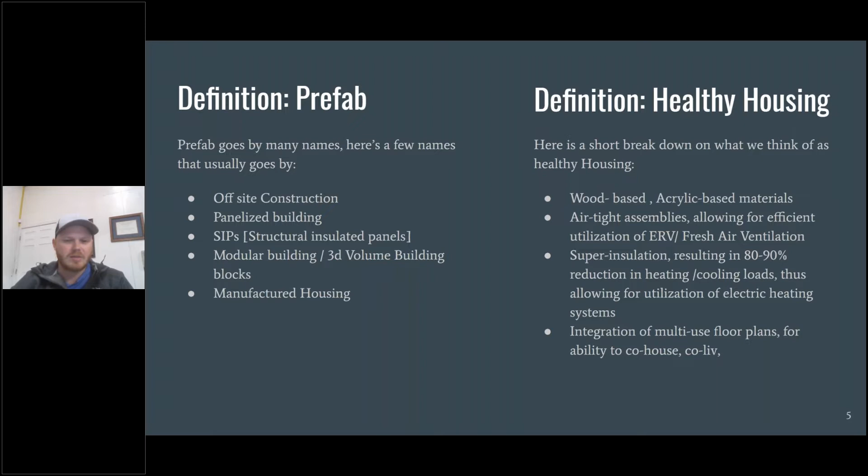Also allowing for the integration of electric-based heating systems, which we find is the fastest track to offset energy consumption. And finally, integration of multi-use scenarios with single-family housing, so folks can do co-housing, co-living, or multi-generational housing these days. With affordability of housing being a key metric, we're looking to find ways to utilize the investment for more than just one single use.

A good way to sum up the current approach for how we design and build is this emphasis on getting away from fossil fuel. So instead of focusing on heating and cooling systems, mostly heating, if you're working with natural gas or propane, we don't do any of that. Out of the box, our focus is designing and building a structure that can be fully electric from the get-go, and that is the benchmark for us, so that folks have the option and ability to add a renewable and offset energy consumption.

So we'd like to walk through an example project with you all and give a little bit of an understanding of just what we're offering, what's unique about our company, but more so what are the tenets of the design and construction of our types of homes.

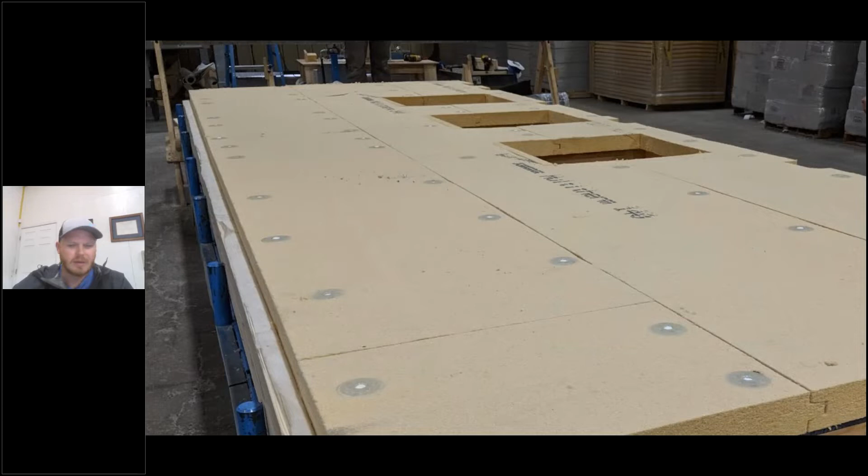Another key tenet for us is that we integrate and support airtightness. Airtightness for us is defined as hitting values well below 1 ACH50. That terminology just stands for 1 air change per hour at a negative test pressure, and that's measured with a blower door testing rig.

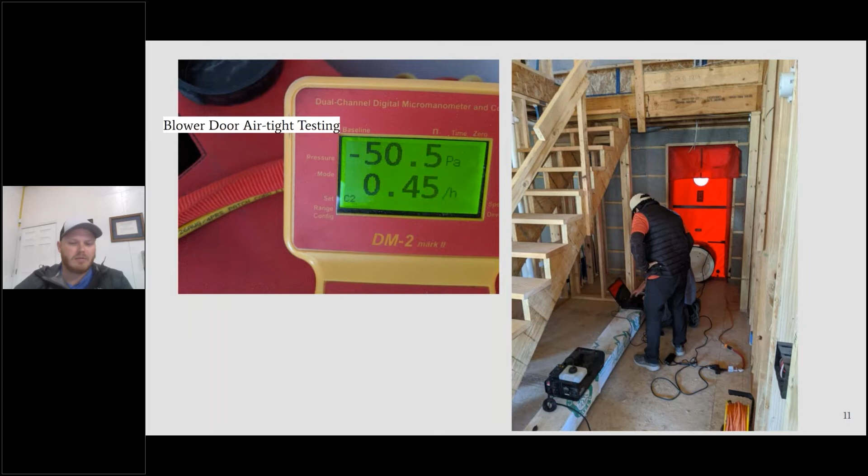Essentially you depressurize the house with a door fan, pictured on the right. We can depressurize the house, get a volume of the space we're testing, get a flow rate of leakage, and apply it over the volume, basically getting a miles per gallon gauge of how tight the house is, looking at the aggregate total picture - foundation, walls, roof, the entire thing - really focusing on values below 1 ACH50 or less.

Integrating also for us, what defines healthy and efficient housing is that once we've got this nice tight insulated envelope, this well-conditioned box, it's much easier to have ventilation and air efficiencies inside the house. What's referred to here on the screen is just a fresh air balanced ERV system.

There are a couple different brands out there. We like the higher performing units, like this Zehnder as a typical example, which means it's bringing air inside the house at the same rate it's exhausting air, and it's pre-tempering incoming air with exhausting air, saving the heat that's already been conditioned inside the house. It's filtering the air and distributing it through the entire house. We have supplies in bedrooms and common spaces, and exhausts in laundry rooms, kitchens, and bathrooms.

When you have an effective solution like this, the ducts - you see the gray ductwork throughout the house - there really is no match for a well installed, great product like this that allows the house to be fresh air filtered, with control of moisture inside the home being the key factor here.

As airtightness requirements increase, we're seeing more and more adaptation toward a fully integrated, ducted solution, which means it's its own system. So it's not a timed bath fan, and it's not a halfway solution.

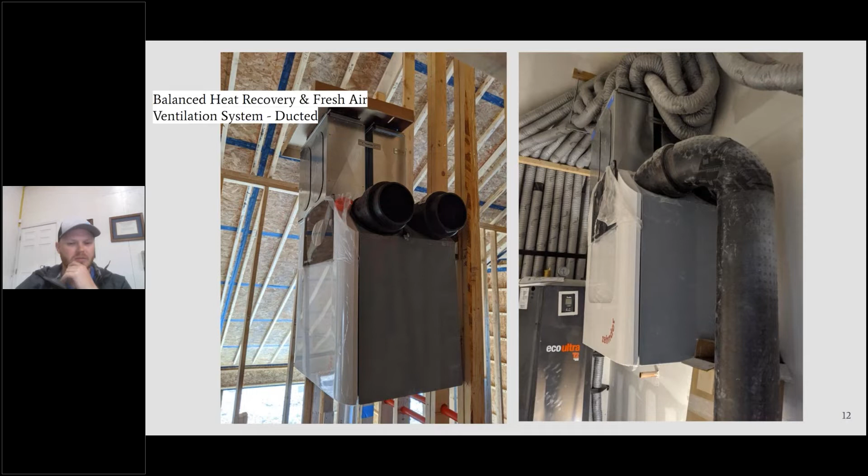It's the fully integrated solution that assumes we're going to be balancing and continuously operating this fresh air system, which is a really nice and effective way to keep healthy fresh air inside the home.

This is just a quick snip to show you what this house looks like from a consumption standpoint. We use energy in the winter months, and we're making most of it, banking most of it if you will, in the summer months. We have a grid tie agreement with our solar system here. This house, I think it's a 4 kW system size, and we're just about zero for the year, depending on our exact usage. So we're proud to have this as an offsetting house based on electric utility.

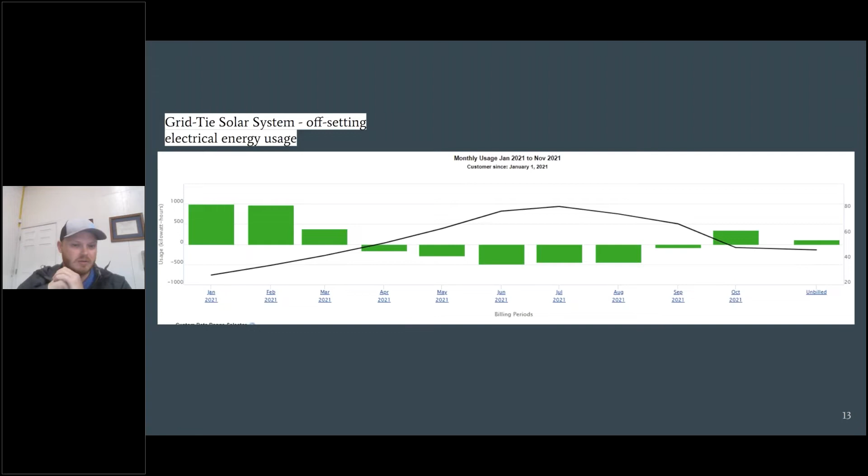So that's a little bit about our focus as a company, where we direct our product. Now let's talk a little bit about the industry as a whole, and then I'll get to some of the steps as well. Talking about the construction industry, it's one of the laggards, if not the laggard industry, if we compare it to industries like aerospace, healthcare, or automotive.

Productivity has been thin for quite a while, and that also translates into construction processes that are focused on a project-based approach, which I'll explain. It usually results in longer time to complete a project from initial start, and a lot of projects, if not most, are up to 80% over budget, which I'm sure we all have some experience with.

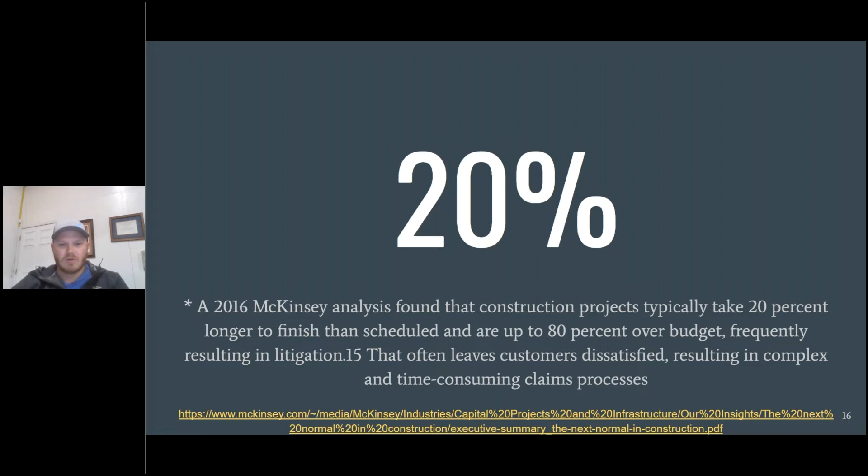So the typical traditional method of construction we find in our industry is project-based focus. This simply means projects are planned from scratch. They're typically designed ahead of time, for the most part not using pre-designed components. And there's a disconnect between the incentive structure of how something is designed and built, and then integrated and put together and assembled at the work site.

Meaning the on-site world tends to be temporary, it's manual. There's a difficulty connecting the digital content throughout the entire start to end of the project, a lot of times working in many different software with many different fragmented teams without standardization or standard content. So this sort of disconnect or fragmentation really is tested right now with high demand, resulting in over budget, over timeline outcomes.

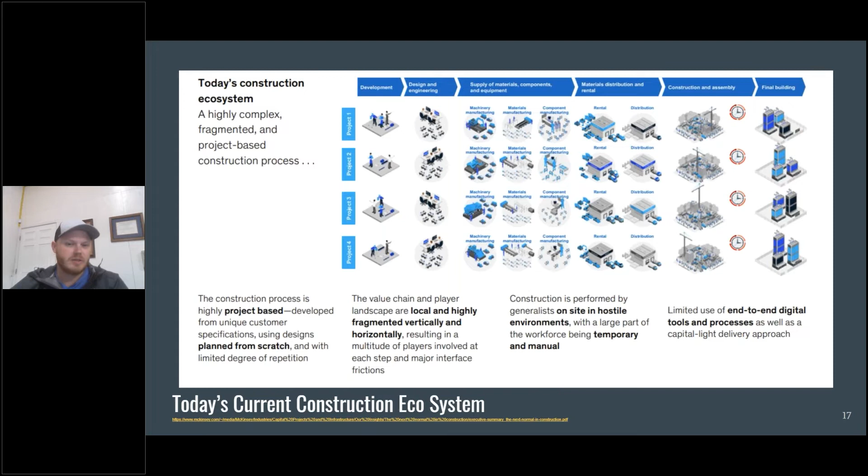And it's the current ecosystem, and it's rapidly changing. So right now the industry is in a disruptive state, which means it's quickly flipping to something I'll present here in a second, a product-based focus. But some of the pain points too are skilled labor. We've got basically a supply crisis now. There's a limited supply of scarce materials, which means the prices spike, which means we're again continuing the trend of being over budget and late to deliver a project.

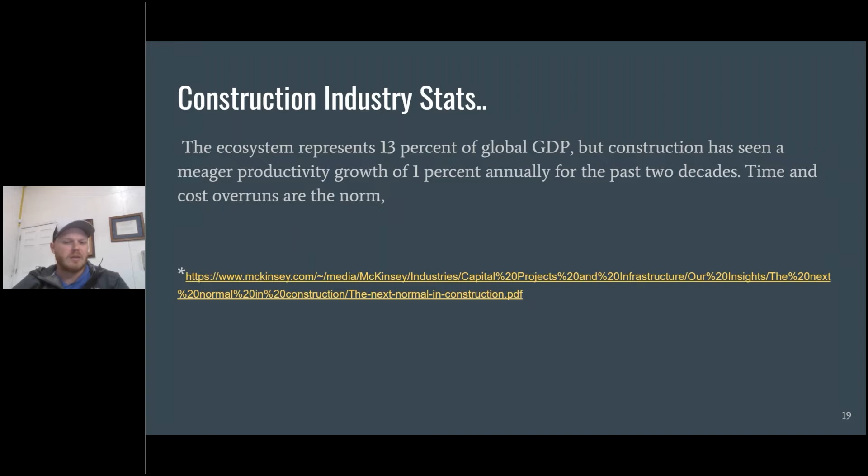Interesting enough, it's one of the bigger industries as far as GDP is concerned, so it's definitely an area of focus, and that's exactly where we focus as a company, talking about how we're working to solve that problem, how we're actively bringing a solution to the marketplace. That's really our step one to talk about today, something we refer to as introducing digital content. So let's talk about what that ecosystem of the future looks like.

So we just described the historical construction industry as more project-based, where it's fragmented. The ecosystem of the future, the one we're investing into and many other companies are too, is a product focus, which means projects that you run through the system integrate pre-designed components that are manufactured off-site and designed explicitly to be assembled and delivered to the work site, delivered to the project address, and assembled in a way that's efficient, on time, and within a cost basis that doesn't overrun.

So some of the key characteristics here is that companies like us, or many others, specialize in a certain end user segment. They design a component library of details that designers, like an architect or engineer, work with or work within. And then that is a connected value chain where there's consolidation and standardization across the chain, which means it's a connected, lean-focused approach to construction. This means you can forecast the total cost, construction, and schedule of something way easier and more effectively because of that early investment and focus on a product-based specialization end user segment, with a library of components or details that are standardized.

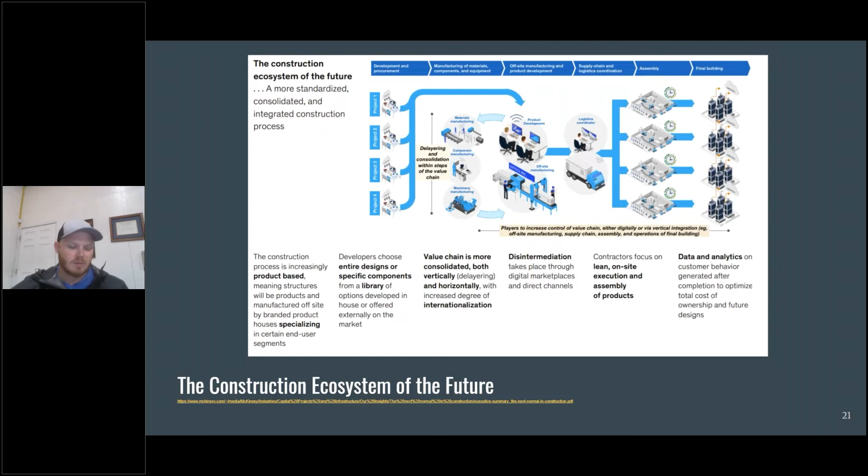And we have all kinds of efficiencies, integrations, where we can really forecast accurately what it's going to cost and how we're going to actually build something effectively, instead of a one-off custom or slower custom-built nature type, which we're currently experiencing right now in our industry.

So how we're going about this as a company, Phoenix Haus has developed something called the Alpha System. The Alpha System is simply just a standard breakdown of connections that define, for us, our focus is single family construction. So there's typically 30 connections that define floor assemblies, wall assemblies, roof assemblies, and how they connect and adapt to each other to generate a certain architectural form, if that makes sense.

What we've standardized are the connections. It's also important to point out the distinction between form, which we'll get into here in a second. But the key characteristic here is that what's integrated, which is the next slide here, is a performance metric, benchmarking off of what we talked about in the first few slides. What we're focused on as a company and other companies do is, let's talk about how we're going to really reduce the energy consumption down by 80 to 90%.

Well, how do we do that? Well, we benchmark off of our climate. Our system is focused on cold climate housing in the Rocky Mountains; that is our business model. And those 30 connections, we've defined what performance values we have to hit at those different connections, or what defines a thermal boundary, a thermal envelope of a design, so that we can hit those key factors and then be able to hit those efficiencies, which then allow us to do things like electric heating systems. We can hit those lower sized systems, so we can look to offset something with solar, is really our objective as a company.

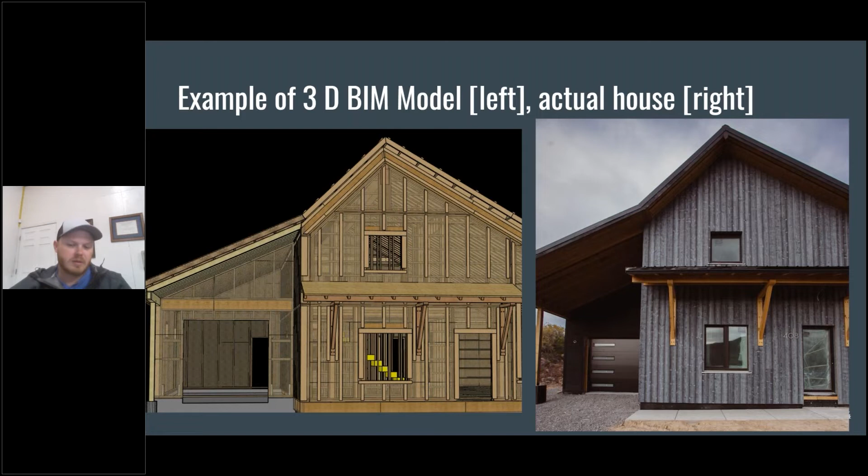We build it first in the 3D world, in 3D BIM. We make sure everything is fitting within the constraints, within the standard connections that we have and offer as a company. Then we integrate the required engineering that's happening at that specific location, if it's wind or seismic or snow loading requirements, that's what's unique about this project, for example. And then we go to actually build the components that make up the house, which we'll get into here in a minute.

So this is a trend, right? It's a trend towards digital content, and that being the focus and feature of the construction industry as a whole, where projects are investing into their emphasis or requirement of having things built in the digital world first.

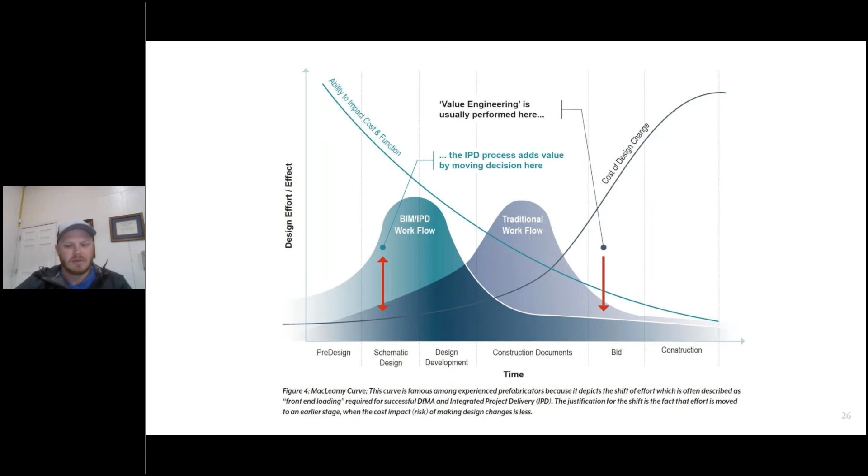And that goes for any project that we work with and other companies like us. We're not just the one company. Again, yes, using a fully integrated 3D digital twin BIM model. And then we use that as a way to make the process efficient. So that's, again, a screenshot snip of what that looks like.

For us, it's really about sharing the content. As far as a process, if we're thinking about what's the 1, 2, 3, first, a company like us has to open source share the content, which we do. So we share the Alpha System detailing that's standard with our network, and designers, architects, folks that are working to generate the design for the customer, are working with our system, working with our constraints, and they work with that first. They have to have the content first before they can design the building.

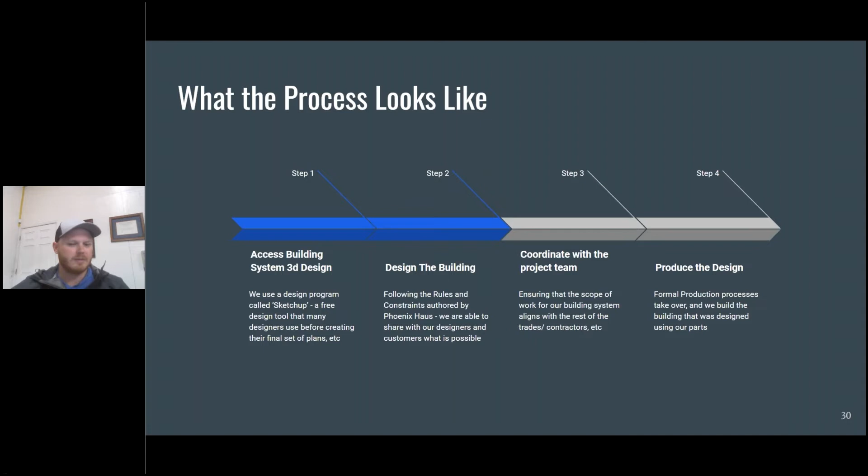Then that content can be shared back with the home office, so to speak, coordinated with the rest of the project teams, and then we can finalize the 3D BIM model. Really, we're agreeing as the entire design team, whether that's internal or external, on a fully integrated 3D BIM model. That is essentially the objective there.

If we talk a little bit more about Phoenix Haus as a company, what we focus on, what we're finding success in, it follows exactly what we just talked about: anything that we can integrate ahead of time, we're after that as a company. A couple of years back, we as a company would build mostly custom designs, custom homes, custom models. As a company now, here in 2021, going into next year, we're integrating and working off of our Homestead model platforms. So we have roughly 7 different models to choose from.

The point being, and why I bring it up, is it's talking about a certain design of an end user segment that then we work and build out on the back end. So what does that back end look like? Well, it's these things. It's the structural integration, the components that we can use as a company, things we can integrate in the offsite facility, and also importantly for us is mechanical integration, anything that's unique or different to this approach of construction, or things that we know trip up the on-site trades, the on-site prescriptive installed mechanicals. I'm sure we've all seen it.

If there's a mechanical design that needs to get integrated on site, if there's collisions that can occur, it's nice to know if you can work those out before in the 3D world, suss it out then, figure out where the collisions happen, make the corrections, figure it all out ahead of time, and then have a plan for when we're in the field versus vice versa.

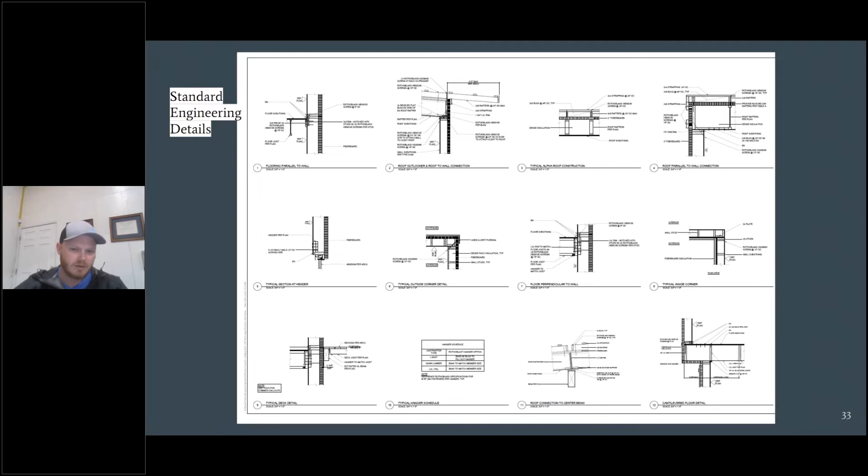So our coded system that architects and designers grab and work with, the open source share, to design behind the scenes. What we have is coordinated structural content, which is extremely helpful when designing. What that looks like is here. Here's some visual representations of what that alpha system design looks like, and I've focused in here onto a component. I'm calling a window a component. Something that is basically either a subassembly or something that's not produced by Phoenix Haus but integrated into our package are windows and doors.

And we like to, when possible, especially on our Homestead models, pre-install windows and doors so that we can deliver the end user, the customer, essentially that airtight, watertight performance assembly, not leaving any kinds of gaps in the scope of package, so that the on-site builder can work with the system installed in the field, which I'll show an example of shortly. Integrating things like windows, which we feel is a very important key element of the performance envelope, is getting the air tightness correct at an opening.

So we actually seal the opening 3 times when we pre-install a window. We do an exterior watertight connection. We do a gasket in between the unit and the rough opening. And then on the interior side of an assembly, we're doing another layer of airtight sealing. And so that sets up the project for success to hit that blower door air tightness kind of out of the box. And right now as a company, we're focusing on pre-installed windows. Doors at the moment are not pre-installed in our system.

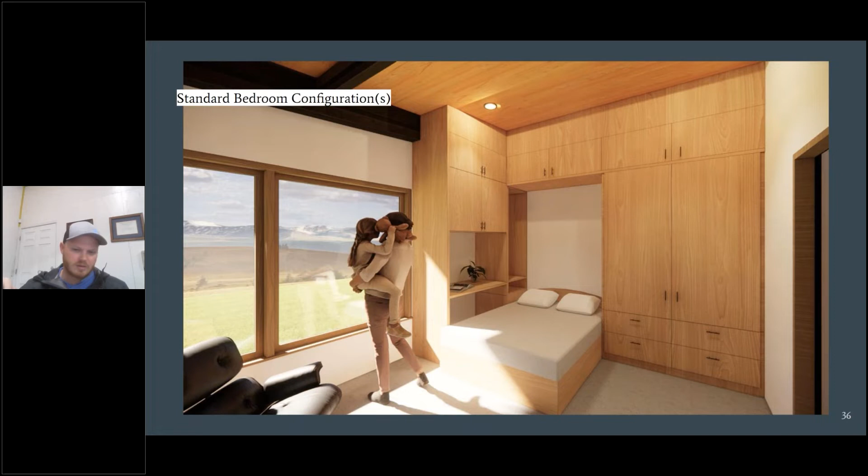Further conversation about our models as a company is we focus on standard content as well from the floor plan perspective. So we have standard configurations for bedrooms that we reuse to create a model option for a customer. Kitchen configurations, also bathrooms too. So we know what works well for efficiencies when it comes to planning mechanicals.

Also, just from a design efficiency standpoint, again, talking about standardized content, basically pulling from a library of details that make sense, things that we know have worked in the past. And so you can rapidly adjust or adapt a design based on how that house is sited or where it's physically located to make it work within the model platform.

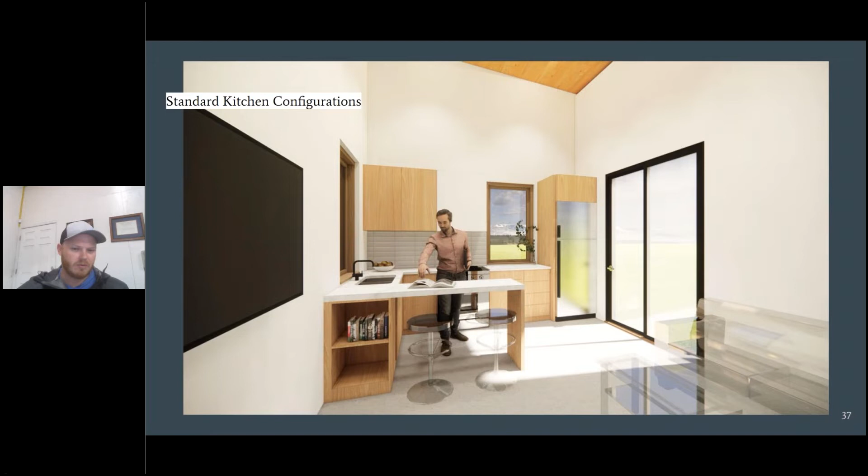We also like to increase the occupancy of an investment. You know, I think ADUs are very popular. ADU stands for accessory dwelling unit, essentially creating an entire separate private livable space in addition to the primary use of the typical single family home. We see a lot of ADUs being integrated into attached or detached scenarios. So is it a distance away that's on the property, or is it actually attached to the primary residence?

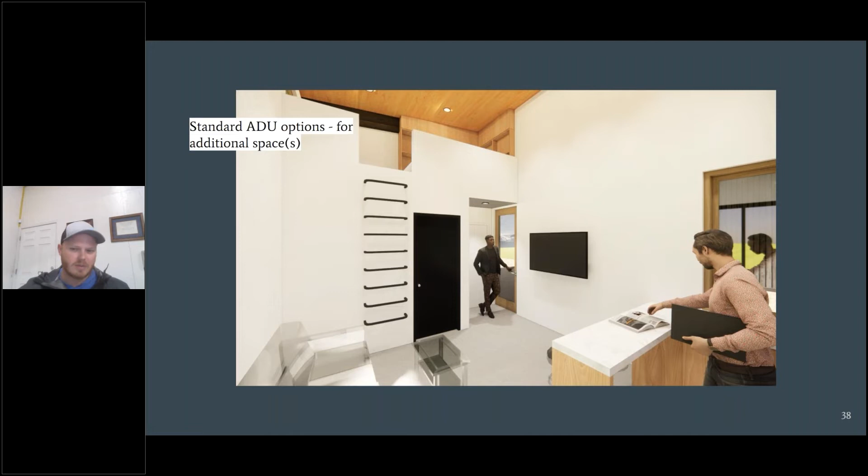So ADU options as well, which includes kitchen, bath, and loft spaces as kind of the smaller option. Typical range that we're seeing is anywhere between 400, I think, to 700 square feet is the typical ADU range for a lot of the houses that we work on.

We make sure to run those exhaust or fresh air supply runs through the house, back to the unit, to the outside. And then we explore and make sure that we know if something's going to collide or hit a structural component, maybe it's a beam or a wall or even a floor component that's pre-built. So if we know those things ahead of time, we can make those provisions ahead of time in our panels that we're manufacturing offsite.

So when the panels arrive, they're assembled in sequence. When the mechanicals go to install, we've already got the penetrations made. The accesses have already been created. It's essentially pre-laid out. This is what I'm talking about as far as bringing up all that design work to the front, front loading it, doing all this work before we touch a stick of lumber or we break ground. It's advantageous to have this content and the work done ahead of time, and it's a visual share as well for the on-site worker or installer.

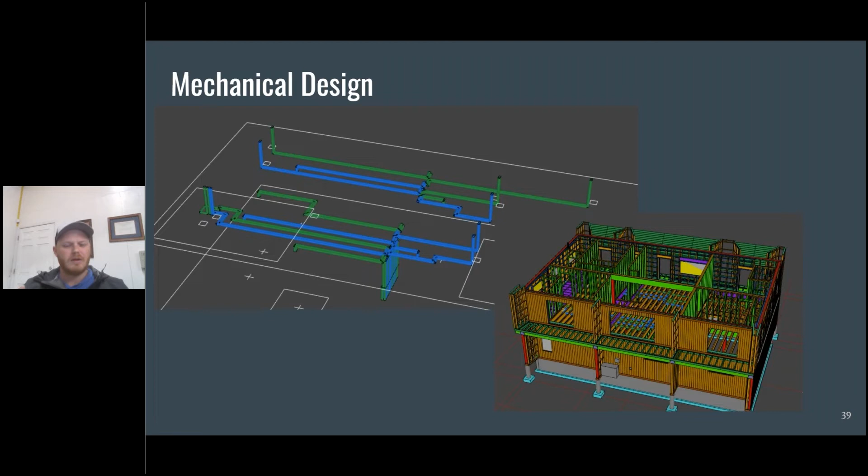So the on-site trades can have a visual reference and breakdown of this as a sequenced PDF, if you will, 2D PDF, or a breakout of scope of package. So what's the bill of materials for this mechanical? So we know what goes in when, and making sure that everything's there to be able to install this at the work site.

So day one really was unwrapping and grabbing, I think there was like 6 or 7 floor panels. These are 30-foot long by, I think, 8-foot wide segments. So 8-foot width is the ship width and 30 foot's the length. And here we're spanning from end to end with the mid-support beam. That sort of install sequence allows us to set that floor in probably a couple of hours, which is really remarkable time.

Things that set that up for success, what makes the installation of these assemblies go smoothly, is the connection between concrete and our wood assembly. I mean, there's much to be said about getting the treated sill plate accurate. So it's square, it's level. It's actually referred to as a leveling plate. So whatever we put on top of that leveling plate or sill treated plate sets up the rest of the house for success.

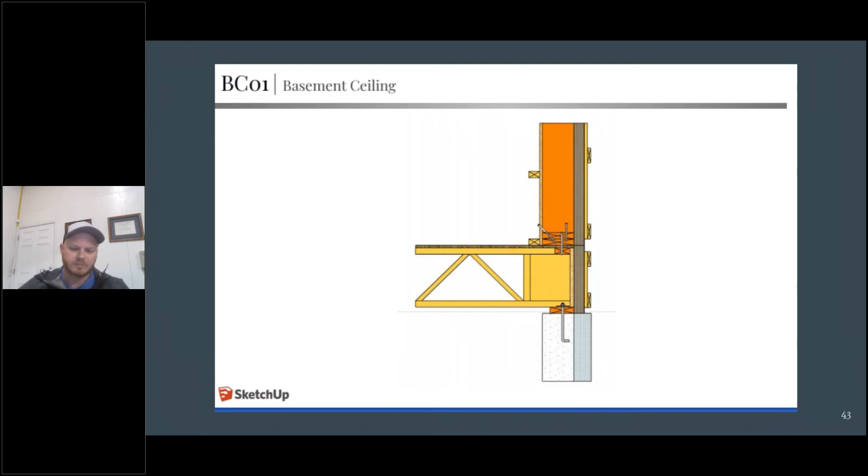Even if the foundation or the concrete is inaccurate, which it most typically is, we can correct that error in that leveling plate, get that all sorted out before the first panel load arrives, before the labor even arrives to install the panels. That's actually the connection that we have centered. So you can see a little bit of what that looks like from a design perspective.

It's a technology that rapidly installs. When we invest into that pre-design and front load the design, the benefit at the end is that when we have a bit more money invested into the design, and like a crane, it's supposed to go quicker. So it's typically taking maybe 2 to 3 months in the field. We're looking to do it in 1 week. So here's day one.

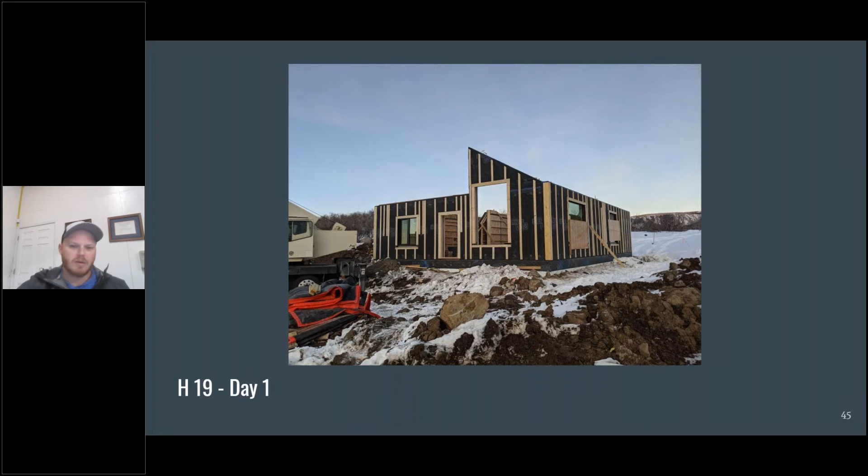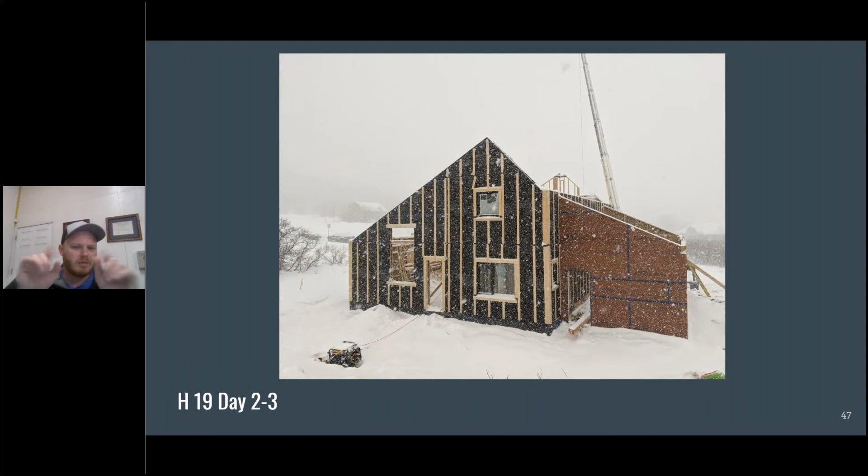This is actually a real snowstorm that happened for days 2 and 3. So some of the pictures are missing, but days 2 and 3 was infilling and installing the garage area of the house, the upper level wall panels, as well as the interior floor system and interior partition walls.

So the photos kind of skip to the end. What we can see here is we had and installed a ridge beam in days 2 and 3 as well, basically getting everything prepped inside to then install the final set of panels, which I think was 12 roof panels. So that was day 4, maybe a little bit of day 5.

And that's a little bit of the documentation of the pre-configured standard content that we use to build this model and these assemblies. And that's the complete scope of package by Phoenix Haus.

I'd like to describe that to understand the context of where we stand right now in our industry. We're not a finished product. Some companies out there do interior finish, even exterior siding and finishes in general, which is neat. We as a company, since we focus so much on performance, like to leave finishes off, so we can execute airtight, watertight seams and tape seams around the assemblies, and achieve a nice blower door test before we go to put on a finish, like siding or drywall.

That's not to say that we can't have more integrations as a company to integrate things like pre-installed mechanicals, pre-installed wiring, pre-installed plumbing, pre-installed chases. We can and are doing that as a company. But as far as the finish level detail, we're not there yet as an industry, I don't think, because we would follow that industry kind of norm.

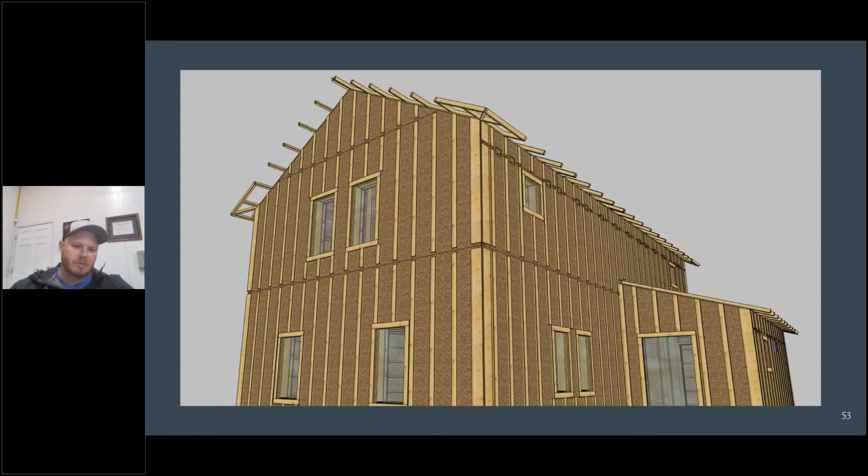So I'd like to walk through a little bit of what some completed projects look like, from this digital fabrication to an image of the actual built project. So this is what we call the H15. That's it designed, that's it built. It's neat that you're basically digitally printing homes essentially, because it's fitting the form and the function of that system to be able to go from here quickly to the actual physical world.

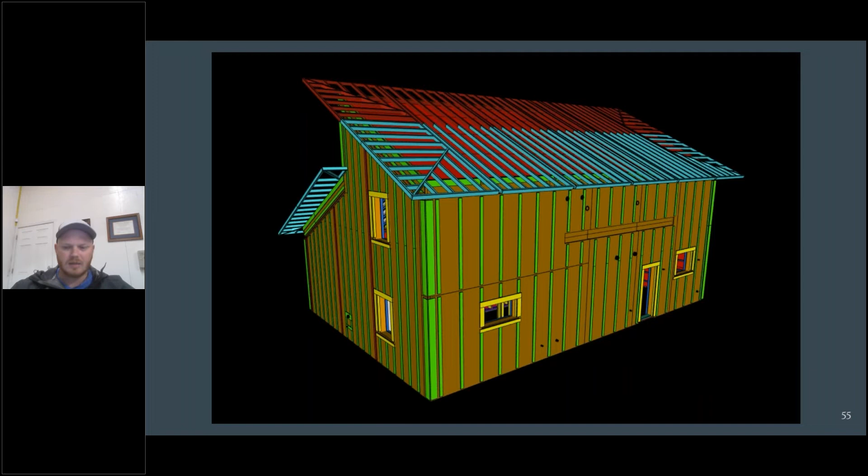Let's look at another one. This is, I think, a story and a half. That's it in the digital fabrication model, and that's it existing at the work site. These projects, they're installing in a couple of days. I mean, let's call it a week to install walls, interior partition walls, floor systems, roof panels.

These few projects that I'm citing have windows pre-installed, though not all of them do. We can see in the images the pre-installed windows, and everything also has a membrane, which is that black membrane. It gets taped in the field, and that tape joint executes the watertight layer.

Once we have an executed tape joint, like even on a roof panel, we're able to get this assembly out of the weather and quickly get it dried in, so to speak. We can weather a rainstorm or rain event, a moisture event if you will. I'm pretty sure the warranties on these membranes allow us to leave it exposed like this for up to six months. Maybe we don't suggest that for the roof, but at least for the walls I think that rings true. It's neat to get it to this level, watertight and airtight, before they push pause.

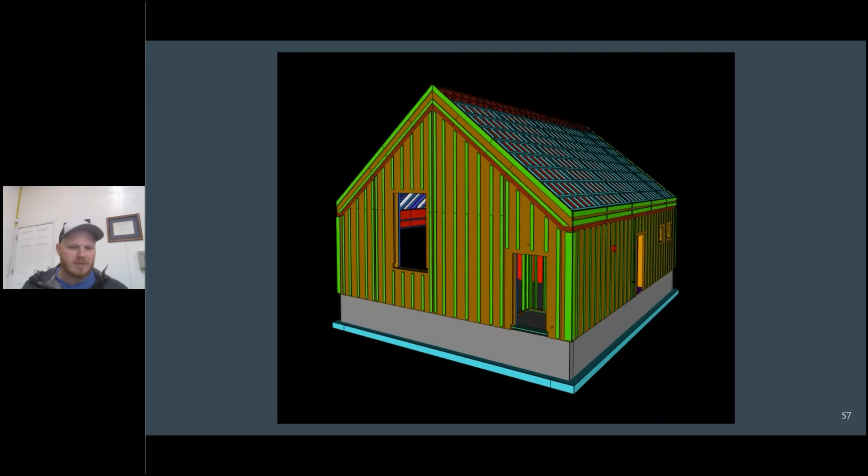There's another one we built that was actually sent to Ohio, which speaks to the ability to ship products at a distance. These designs and builds, when it's the right size, can be shipped very effectively on a standard semi truck, like a drop deck semi. We've sent projects to the Pacific Northwest and to the Midwest. What's neat about the standardized content is that you can handle well any different code requirements from different states, in this case Ohio, or in the past Washington State.

Having the pre-designed workflow, the modeling, and the front-loading of the design allows us to have a fully engineered building essentially. When we manufacture these components, we pre-inspect them, or they have an inspection designation that travels with the panel to the work site, which means building departments have confidence that when something arrives, even if it's a closed panel, it can assemble within the requirements of the building department. That work has been done ahead of time and sussed out in the design. So at the work site, somebody is just assembling the parts again in the field, then executing a final structural inspection once the panels arrive and are erected.

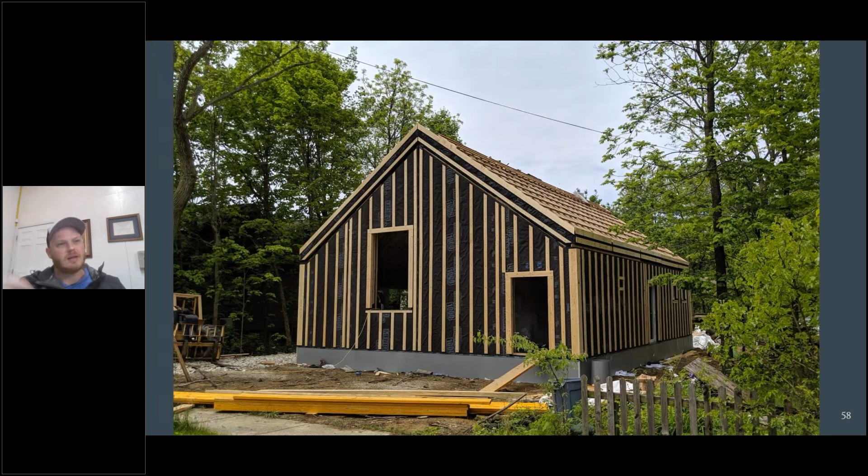Another thing to point out on that thread of inspection: because we have a fully watertight exterior assembly and focus on airtightness, we bring the shear layers to the inside, meaning all the mechanical connections for the house and panels happen on the inside, the warm side. That means all the work to wrap up installation of hardware and the final structural inspection can happen from the interior perspective, which is really helpful—we don't have to climb around the exterior of the house to put these panels together. They're attached with essentially a cocktail of structural screws, all from the inside, except for the ridge line of the house where the screw attaches to the ridge timber. That's neat because it means work can be done on the inside, the warm or watertight side, to punch this out and make it work well for final inspection.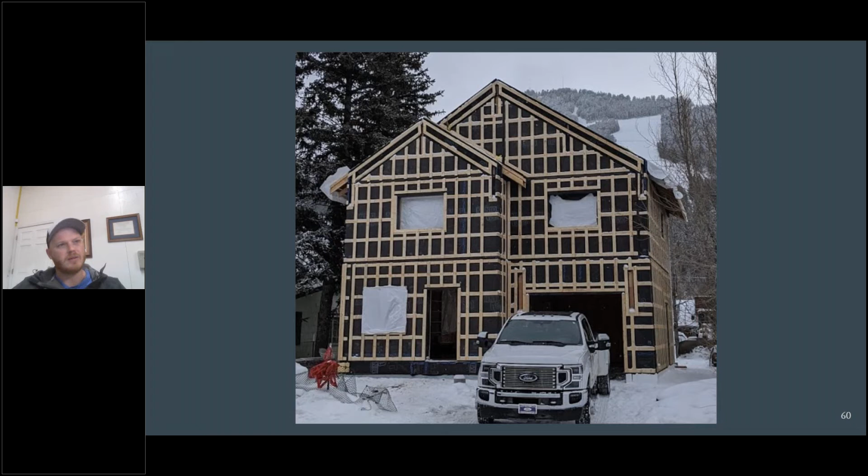Here's an example of how something actually gets shipped. We ship something as what's called a wall bundle, or a wall, roof, or floor bundle. We've standardized the shipping to fit onto commercial trucks, typically a step deck truck, via a design linked to the 3D BIM model. We essentially say we're playing a game of adult Tetris, trying to fit within the shipping constraints of height and width. Weight isn't too much of a concern, but height is typically capped at 13'6", with an 8-foot width. So when we design a house, we actually work backwards from the shipping model, so we don't design the walls too tall or too wide—same for roofs and floor assemblies. Everything has to fit on the truck, which brings us back to the ability to make something in the offsite workshop.

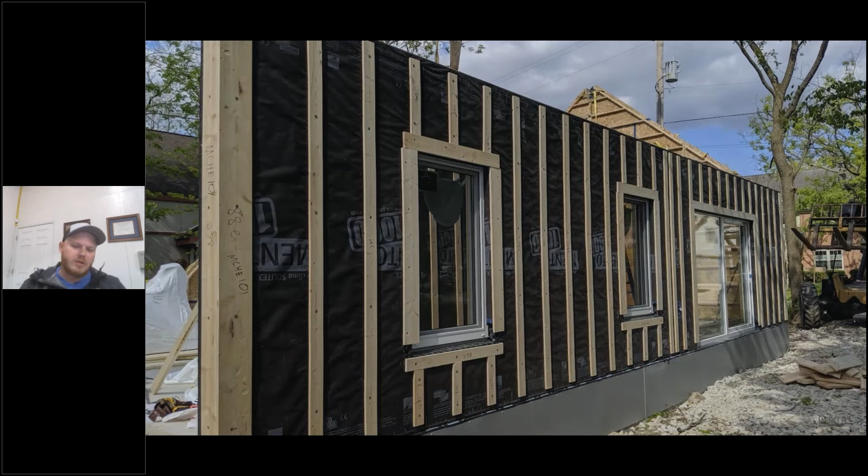Here's some more pictures—again, these are pre-installed windows with site-installed doors. Here we have a pre-installed window that came within the panel, part of the airtight, watertight layer. There's some final detailing that happens at the work site, like a metal sill pan from this window manufacturer. Again, we have a watertight assembly, and the interior is already airtight except for the panel seams, which get air-sealed at the work site. Work can happen immediately on the inside and exterior of the building once it sets. Just some nice different angle pictures of what an assembly actually looks like with a pre-installed window.

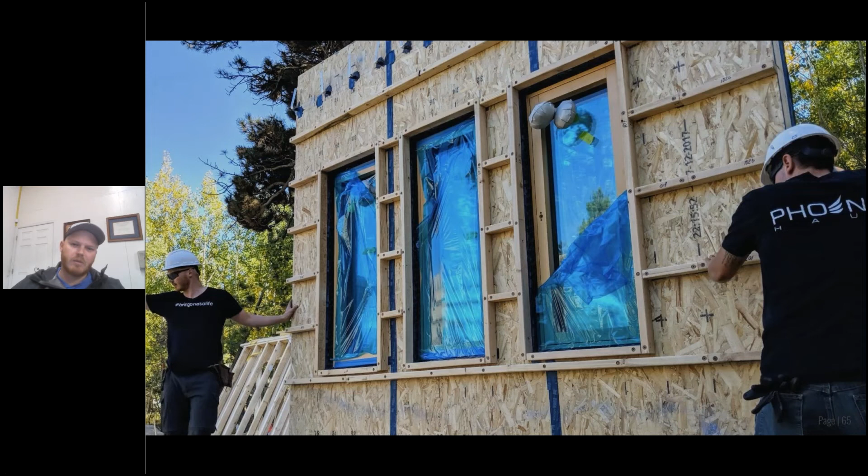A couple more pictures here of what our scope of package typically is. So we have exterior wall panels, but we can also bring things like partition walls, floor systems, and even loft kind of mid-span walls like we see here at the top of the picture. The important part is that we're looking to find ways to make sure the sequence of install can still be efficient. We want to offer the value of essentially a framing trade, bringing partition walls and floor systems, which allows us to offer a full scope of package.

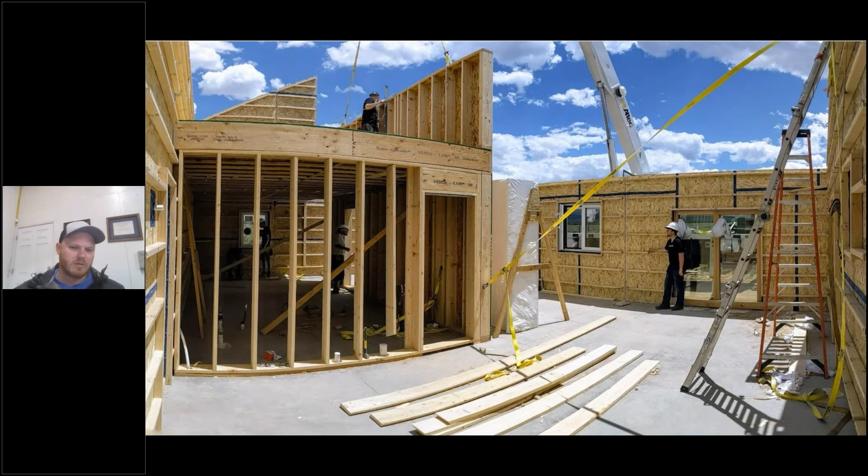The install efficiency means that we don't hold up the roof installation, so like the roof panels, because we're having to stick frame a partition wall or a floor system. We'd like to avoid that, so as to really install sequence something in one go, looking to do it in around a week or so for these kind of smaller 2,000 square foot size projects.

We also like to integrate and design in the digital model any kind of steel, or in our case, we like to work a lot with glulam or structural components. Like I mentioned, talking about how we work with ridge beams. This is an example of a midspan or ridge beam, where a panel structure is sitting on top of a ridge beam.

The important key metric here, the characteristic, is that the beam itself is pre-processed off-site, just like our manufacturing facility. So we work with a couple different manufacturers located in the Rocky Mountains that actually pre-process timber with the inputs of the same 3D BIM model, which is amazing if you think about it, because it's another component that gets designed in 3D, integrated, pre-processed, and installed in sequence with exacting tolerances for the install sequence.

That's really important to bring up, because that means the entire structure of the home is part of that digital fabrication package. And we're using standardized things, which means we have standardized glulam sizes that we're working with to integrate in the design.

That standard connection pockets into our wall. We have standard connections as far as how the roof sits on top of the glulam beam. The hardware to attach the roof to the glulam beam, or to attach to the wall, is also standard, which means, as you can probably see I keep repeating the same word, standard, we're talking efficiencies. Now we're talking about how that informs a product, which is the efficient install of this type of end product segment, which is single family, low energy use housing, like we described.

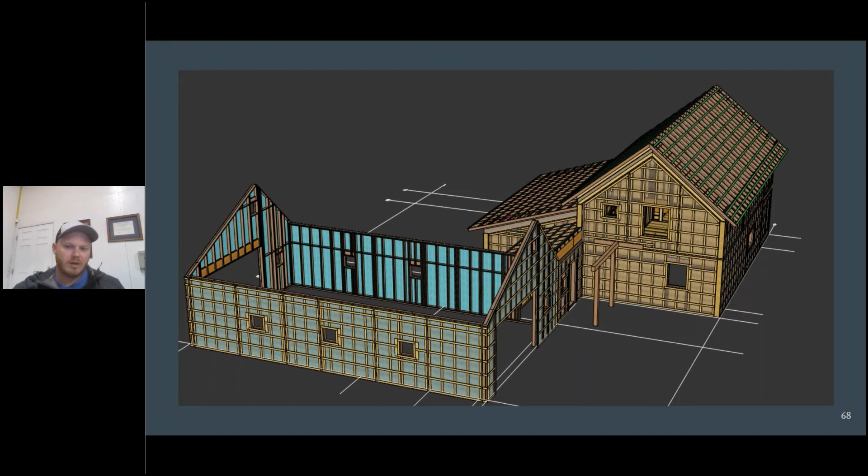A couple other pictures here, just again the digital fabrication model, and then reality, the real life scenario here. Again, it's always the reoccurring same assemblies, the same buildups for a cold climate. It's just that we can adapt it to different architectural forms.

Here we have a typical gable residence with a shed roof alongside a pole building that was not part of the conditioned envelope, so it's a thinner wall package. The point here is that we still have pre-installed windows, and it's installed at a site that has a very short time for install.

This is here in the mountains near Crested Butte, so there's probably a 5 to 6 month window for construction. This was shipped and installed within a matter of, I think, 7 days—something that's typically taking maybe 2 to 3, maybe 4 months on site just to get dried in.

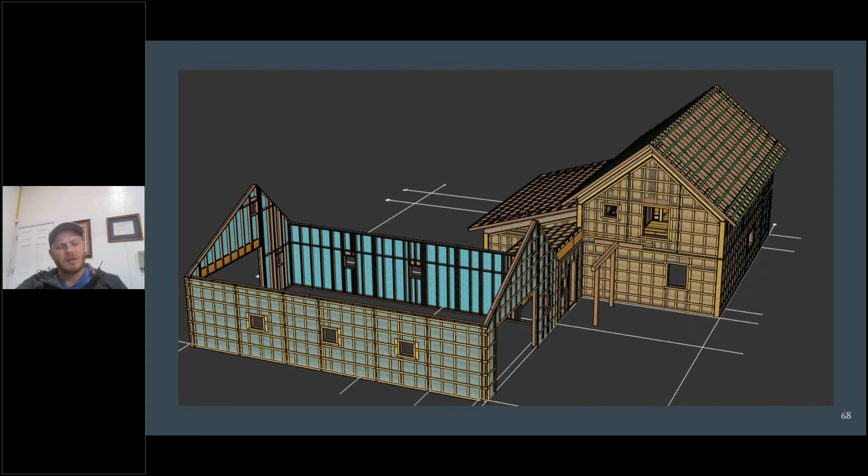Finally, it's worth mentioning and showing a picture that we're using CNC technology. We connect the 3D BIM model, which looks like this, with an output that speaks to our equipment, either manual or semi-automated. The ability to bring the digital content to a computer-guided saw is really key. It means it's universally accurate every time, processing the part within a cut tolerance, and every piece we work with to generate a package like this is pre-processed on a CNC saw.

So we know that when something is cut ahead of time before it gets assembled and manufactured on our offsite tables here at the facility, everything as an input is going in as an accurate cut each and every time. There's also the ability to inspect material, to cull material, to cull wood, so that we reject things like warped boards, cupped boards, or twisted material. There's a quality process there that we can plan, and we also use that culled, rejected material as inputs to another process.

So our waste factor is very low as an offsite manufacturer. We have very little waste. We reuse pretty much every material, and the material we do have is wood-based, so it's not a detriment. It's not like we're throwing away really bad material. Most times, cutoffs and wood can be used for other purposes.

So that's good peace of mind when someone's talking about how to build a house using this type of approach or technology. Now with that, I think we can open it up and ask a few questions.

Jim, I think that pretty much is the breakdown of the presentation. Yeah. Wow, Bill, thank you very much. That is fantastic, and we do have a lot of questions.

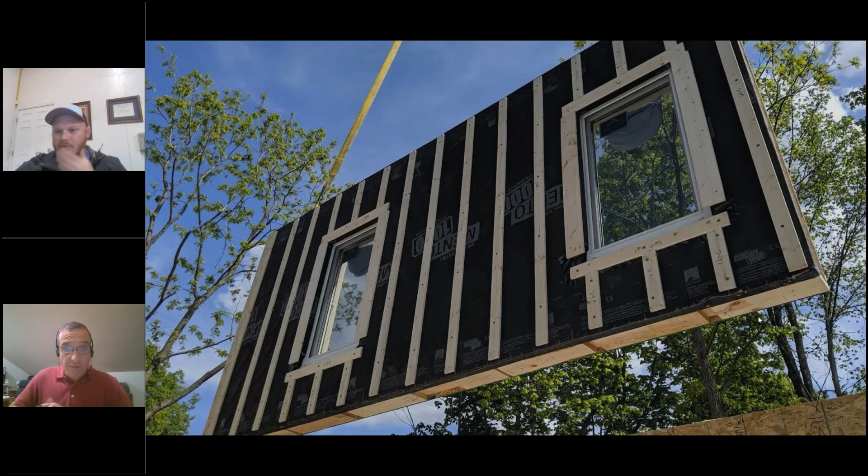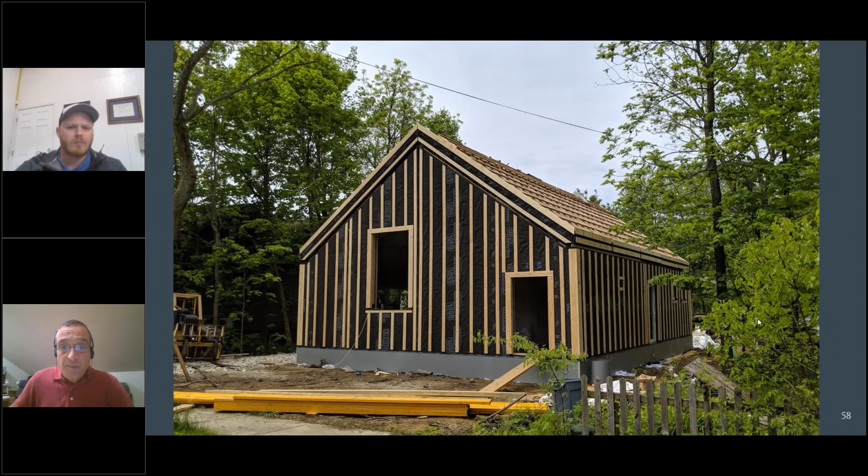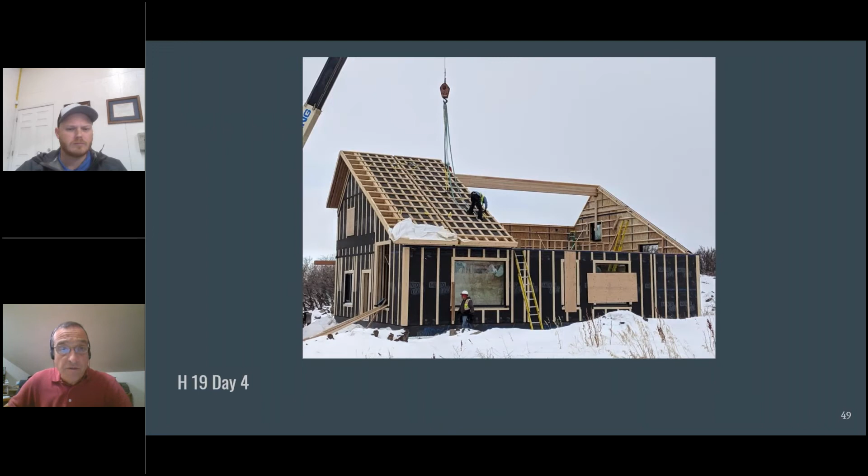I'm going to invoke my prerogative and ask the first one. I was particularly intrigued by your use of the recycled wood chip exterior insulation, which also eliminates the greenhouse gas footprint that comes with polystyrene and polyiso foams. What is the R value per inch of that wood-based insulation that you're using?

Yeah, typically I think it's right around 3.4 or 3.5 per inch, if I'm not mistaken. So if you express that over the board, the material itself is typically 2 3/8 inches thick, so we're looking for an R factor of somewhere between, like, 8 and 10 on the exterior, if I'm not mistaken.

Excellent, thank you. We have, folks, about 40 minutes and a lot of questions, so I'm just going to jump through these from top to bottom as quickly as we can here.

Does Phoenix Haus consider the use of geothermal heating? Yeah, I think geothermal is definitely an application of technology that works with these houses. That's what's nice about this building standard, or the way we go about it: however you want to cover the heating or cooling loads of the house, no problem. I think the benefit we bring, or this technology, is that it reduces the total amount of heating and cooling load. You can use more efficient appliances.

But yeah, that would be a suitable approach for heating or cooling, sure. Are you willing to quote a rough dollar per square foot for build without site prep?

Sure, if I can talk about costs in a couple different ways. Our system here, like you saw, our scope of package is trending around $100 to $110 a square foot of finished floor area. And realizing that's just the scope that's here on the screen, but as far as finished construction costs, it ranges off of the market. If we're talking about Denver or Grand Junction, we could be at $300 per square foot finished, but we're seeing it turn up to somewhere in the 4s and maybe even the 5s in the mountain markets, dollars per square foot finished floor area.

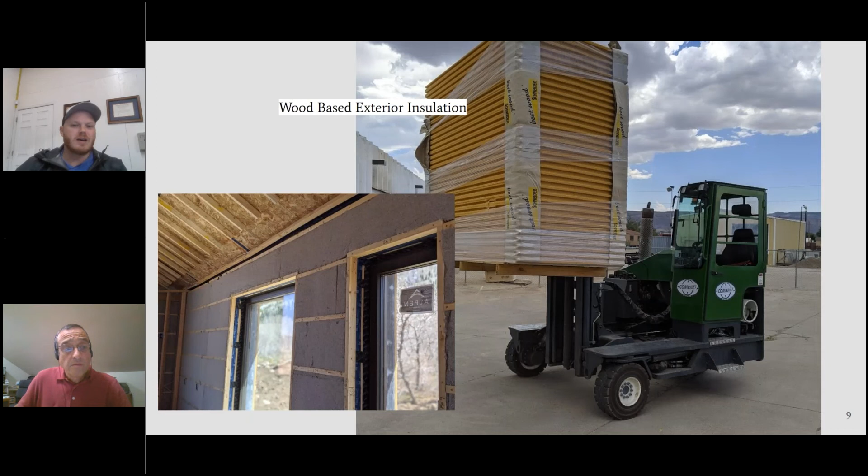Thank you. Can you talk more about in-floor heating? I understand a benefit for heat pump is lower temps are needed than for a forced air system. What are other benefits? The really nice thing about the in-floor heating system is that it's a very even heat. It's consistent. When it turns on for the season, it sips energy, and there aren't dramatic changes in temperature. You can set it at your set point, and it's a very even heat. It also eliminates dust—air source based heating and cooling systems require you to move air to heat or cool something. Here, you're heating up a surface, and it's a liquid happening behind the scenes. So it's a cleaner, more even heat, I would say.

How does your approach impact construction waste? And I would add to that—could you divide that between on-site and at your factory?

Breaking it down with the factory, you can actually plan waste, meaning if you have a programmed cutoff, because cutoff is inevitable. If you have a bunk of wood and want to make walls or roofs, you'll have cutoff material after making your cut to make that assembly. But we know what that cutoff is going to be because it's been designed in 3D, so we can forecast the amount of cutoffs and use them somewhere else in the project or around the shop.

We like to use cutoffs and excess material for the ability to ship something safely, meaning we block out and use extra pieces of wood to ship something and put it onto a truck. Same thing with OSB or plywood—we're constantly recirculating a cutoff, maybe even to the next panel, and you can actually plan that waste.

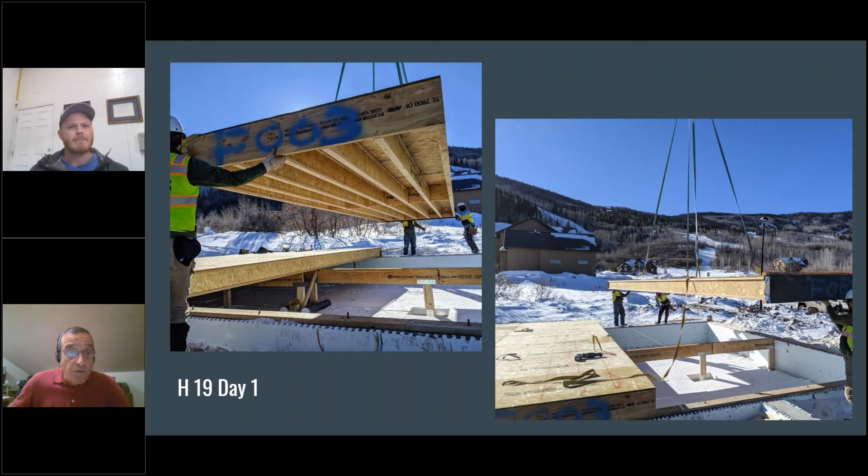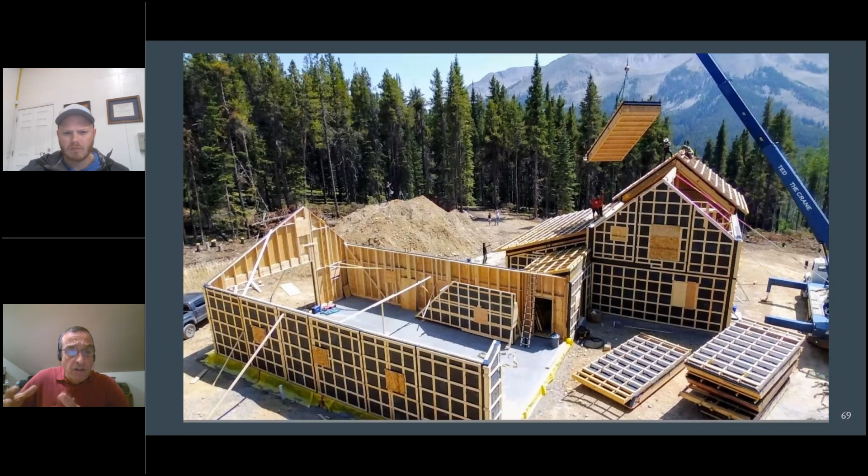Your Homestead 21 shows a large overhanging roof. Is this custom sized to match winter, summer sun for the location? And I would add to that, if you could talk the bigger picture about passive solar embedded in your design. Oh, totally, that's a good question.

This overhang is speaking definitely to the aesthetic of the house design itself. We have other models with gable roof assemblies that are really more just going for the aesthetic look. You're right, it does have the benefit of allowing it to be used as a shading object for the upper windows.

Out of the box, from a passive house or passive solar perspective, we pragmatically do our very best to not overheat a house based on where it's specifically located, but there are site adaptation requirements for the design to do a siting and lighting study—which direction the house is facing, what's the potential ability for overheating, and being aware of those openings on the south and western facades, then having a shading object or solution to not overheat.

So what's integrated is the ability to shade some of the windows, but it's definitely a site-specific study to make sure this does not overheat. Overhangs can be used, porch overhangs even, but also interior shades can be used as a shading technique as well—that's pretty effective. Yeah.

Are you exploring or looking at any wood alternative options?

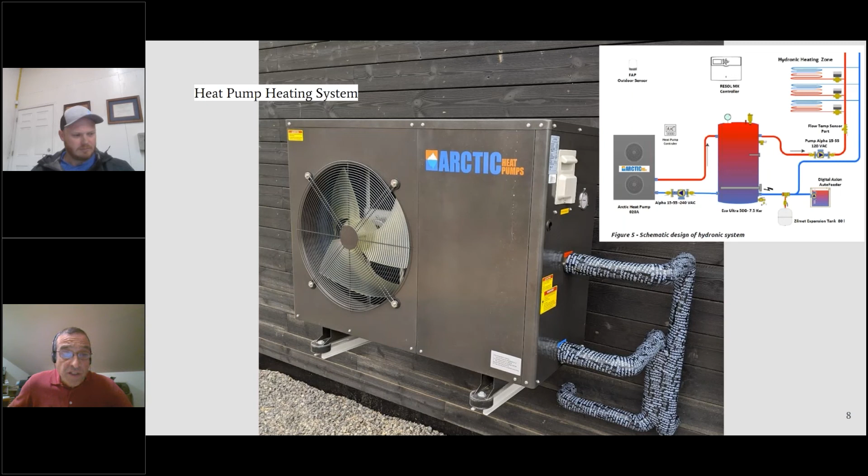What approach is used to minimize thermal bridging at the field joints for the panels? So everything is actually sleeving, and I'm trying to see if I can find an example. Excuse me if I skip fast here. I'm just going to go to my detail.

Every joint around the thermal envelope has a sleeve connection designed in, which means the fiberboard in this case, in this picture on the left side of the screen, is designed where it's actually overhanging the stud assembly, which means it's a male to female connection all the way around the assembly. So there's no exposed joints anywhere on the exterior when we use our system details. So it's a sleeve male to female connection, so it does get covered up. It does get insulated continuous.

Is there any caulk used in that before you join those panels? You can do that, caulk or gaskets. We rely a lot on that on the interior perspective. So we seal and tape the interior, in this case, plywood or OSB. So not at the moment, but yes you can, and we do tape most times on the inside.

Next question. I know you're using Alpen high-performance windows from Colorado, which are excellent and local. Have you considered lower price units like the Polish windows imported by Denko or others? Several European manufacturers exceed the performance of Alpen. Yeah, we are. We like to say that we're agnostic to the window and door choice. For us to pre-install something, we have to thoroughly understand the requirements of that window and door system before we can offer it as an installed scope of package. I'm thinking that if it's a similar window style design and installation theory of brackets inset, it's something that we could definitely include or add into a scope of package, sure.

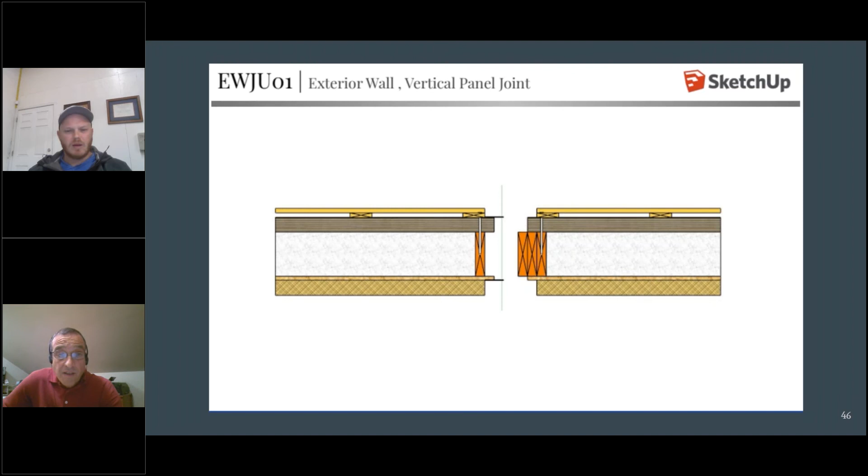Some of the reasons that, like Alpen, for example, you see us using is also because of the order lead time from the procurement standpoint. When someone places an order, when we look to offer a pre-installed scope of package, we like to have those as inputs to the manufacturing process. So the shorter lead times are advantageous. Those other window brands most likely work and are similar install? Yes. I think for us, we're always thinking about it from a timeline perspective.

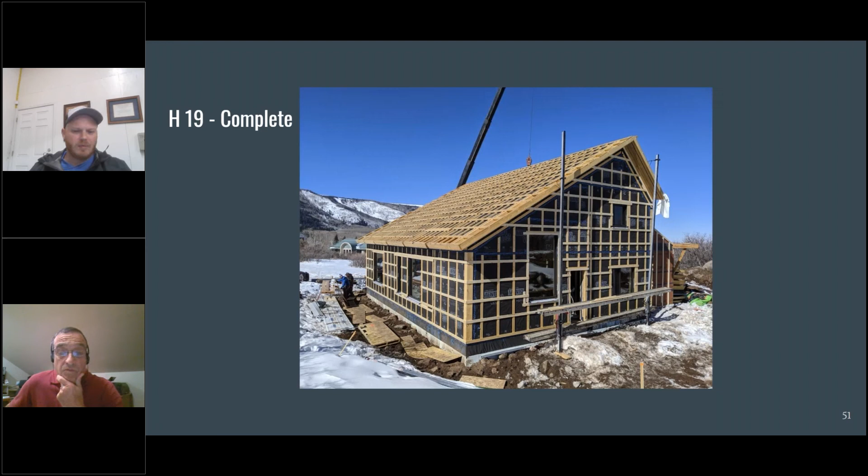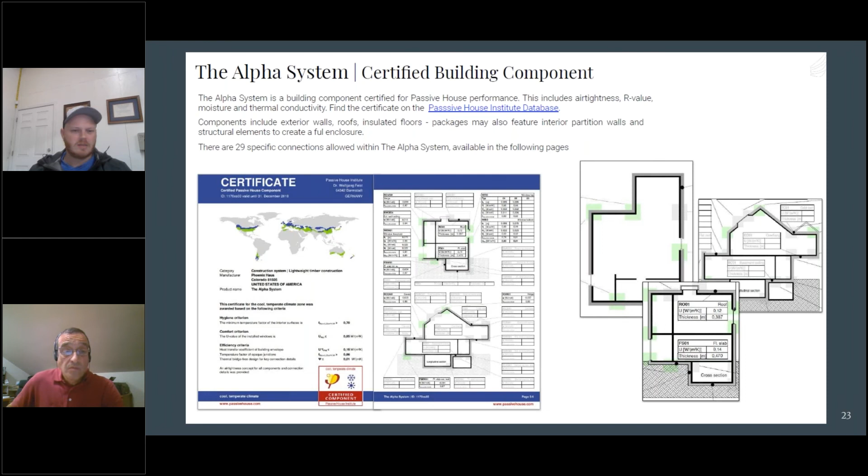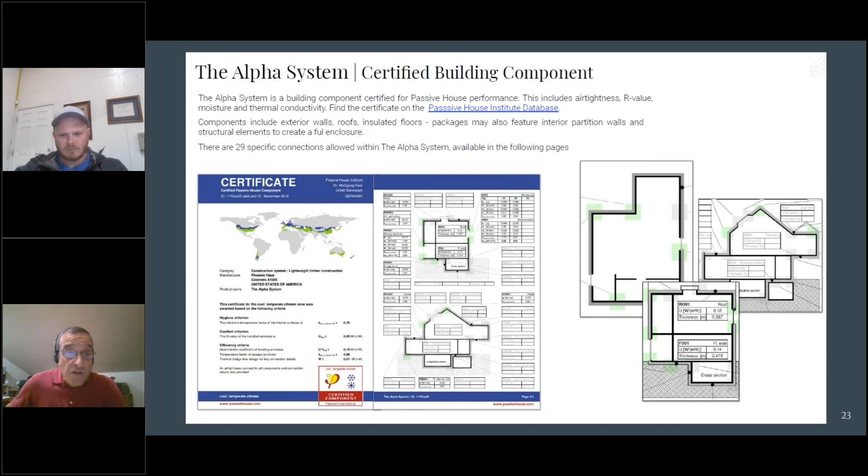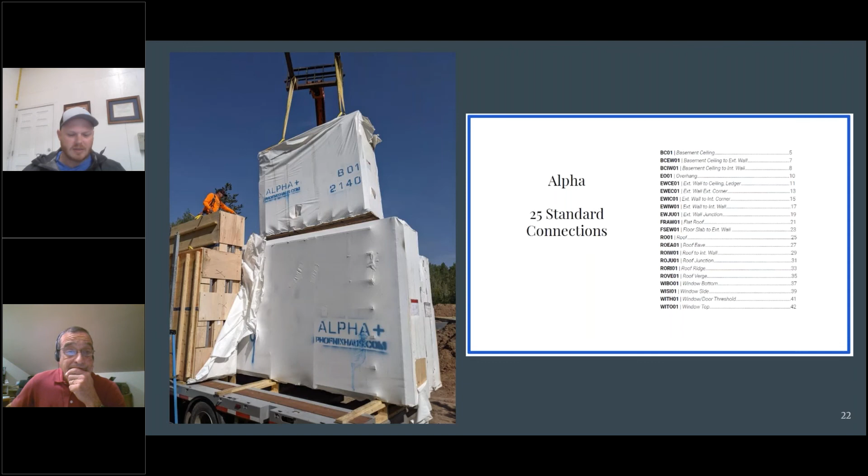Besides the ability to have chases pre-built, what about plumbing and electrical connections in the panels and the use of pre-made conduit? Sure, that's a great question because it's something that's on the horizon for Phoenix Haus. As we move into our new facility, the new HQ, we'll be going into version 6 of our system. 6 means it's the sixth version of it, kind of like a software technology. So at the new facility, we'll have the ability to stand up our assemblies in something called the gantry. The gantry allows us to hold something vertical and to finish it from both sides.

When we have that technology, we can start to integrate electrical and plumbing, at least rough runs to get 80% of the way there, and start to offer that to our customers so you can take some of that work that's happening in the field and pre-install it on the assemblies, yes. So see it coming online for version 6 in the new facility.

My understanding is most prefab inspections happen inside the manufacturing facility. Is that the case with your process and products? Please elaborate. Yes, it is. Right now, actually, something called an ICC-ES report means soon we don't have to actually have a physical third-party company come and inspect. We handle the inspection process, yes, to answer the question. How we're currently doing that is via an in-person third-party designation inspection. So every panel gets inspected, every frame, which means there's an audit report that comes along with the order, and that goes along with the submittal to the building authority.

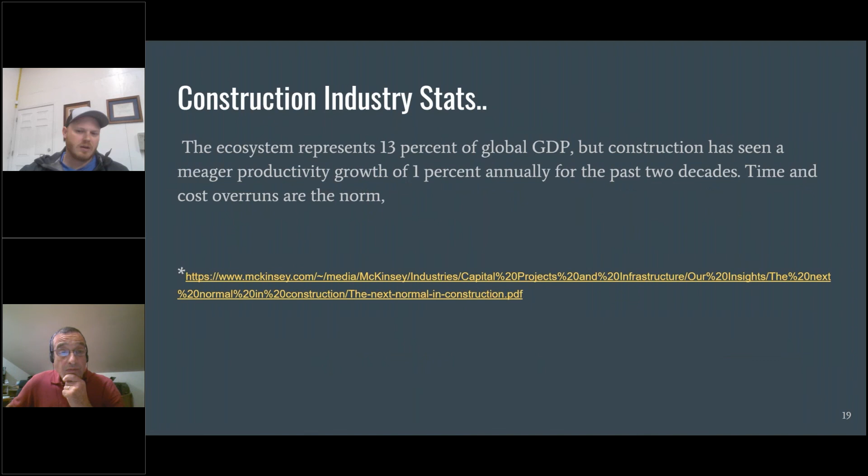So next question, is all the design work done via SketchUp, or do you need other CAD or BIM tool sets to design and architect? Yeah, no, the system itself is exportable and can work in pretty much any architectural software. We have a lot of designers and architects that work in ArchiCAD, Revit, AutoCAD. It's pictured as a SketchUp part, but that's only as a visualization tool. It's accessible. It can be used in many other softwares to be designed with. Yeah.

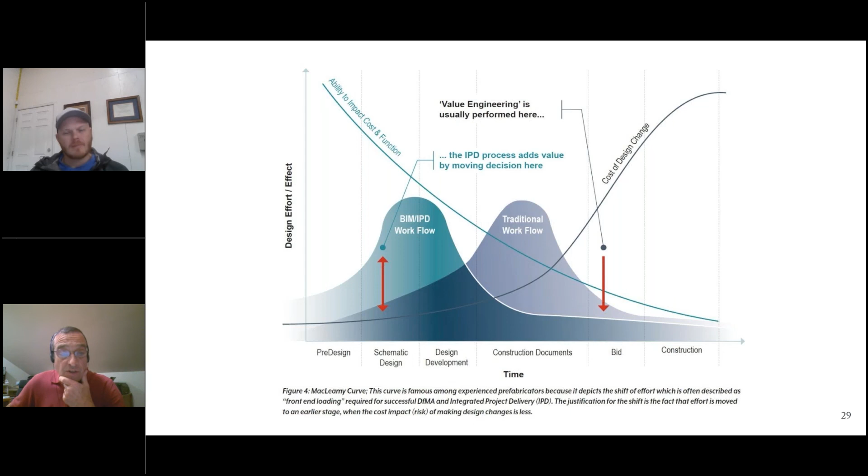Next question. Developers like Lennar seem to think that Americans want pseudo-quaint cottage-style homes with tons of ridges and alcoves. Passive houses are near impossible with interrupted wall surfaces. Do you think those consumer expectations or tastes will change?

Yeah, I mean, when it comes to the design, we talk a lot about what would work to an acceptable level of either the consumer's taste or an HOA or what the requirements are for a neighborhood. If we have to jog an assembly or do a dormer or bump out, we can with the system. It just further derates the performance, and we can back that into the energy model of the home to make it perform. Said another way, we can get houses that have more jogs to perform. It's just more work on the design end.

For us, we do run into many HOAs where we have to change the way that the house looks and how it presents itself on the streetscape. But we can integrate those requirements early on in the design process. As far as the approach we're going as a company, we like the cleaner aesthetic. We like the clean lines. We like the simpler forms as long as it's done tastefully. But we can handle and have built the more complex if required. Yeah.

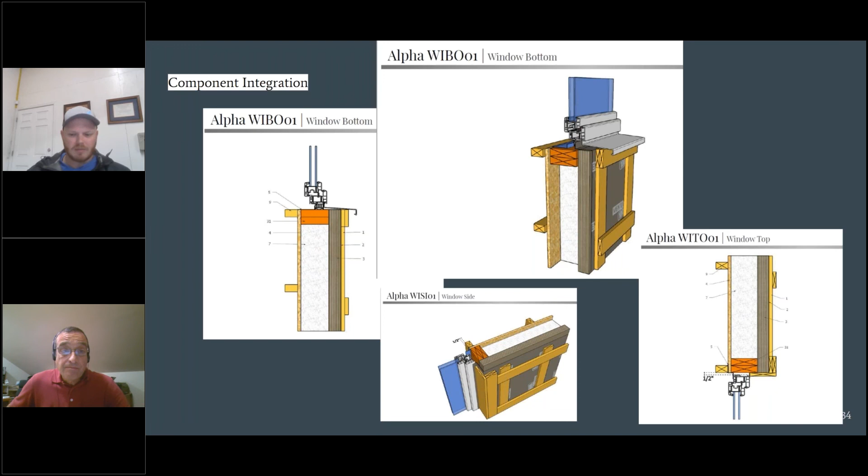Have you done any CLT projects? CLT and glulam material is close to our heart for sure as a company. We love working with wood, and that fundamentally is what we're referring to when we say CLT glulam. We work with a lot of glulam beams and structural components. We've yet to install CLT as a floor or roof material, like a spanning, structurally graded material. But there's no reason why we couldn't, to answer the question.

And we actually have some really great connections in the Pacific Northwest of both manufacturers and fabricators of CLT and glulam. So if there's any interest after the presentation looking for a resource for that, please reach out and we can connect you if you'd like to see a supplier or a company that does that.

Just in case there are others like me that don't know what CLT stands for, could you define that acronym, please? CLT stands for cross-laminated timber. So it's literally just what it sounds like. It's where you put different pieces of material together in a sandwich, and that's a manufactured product that gets glued, and it's a heat-treated process that makes a stronger structural assembly, kind of like what's on the screen there. That's the glulam that's on the screen right now. It's similar to that.

How does your product work in the multifamily apartment or hotel world? Is that feasible? Do you have any experience in that space? Yeah, when it comes to the multi-use or the larger scale commercial building, there's no limit to its use. We top out from a stories perspective at 3 stories. Then it turns into probably a different theory of design and engineering. But we can build a bigger commercial building. So there's not a limit there from the offsite perspective, no. We've not yet built a hotel to date or an apartment complex, but we have built neighborhoods.